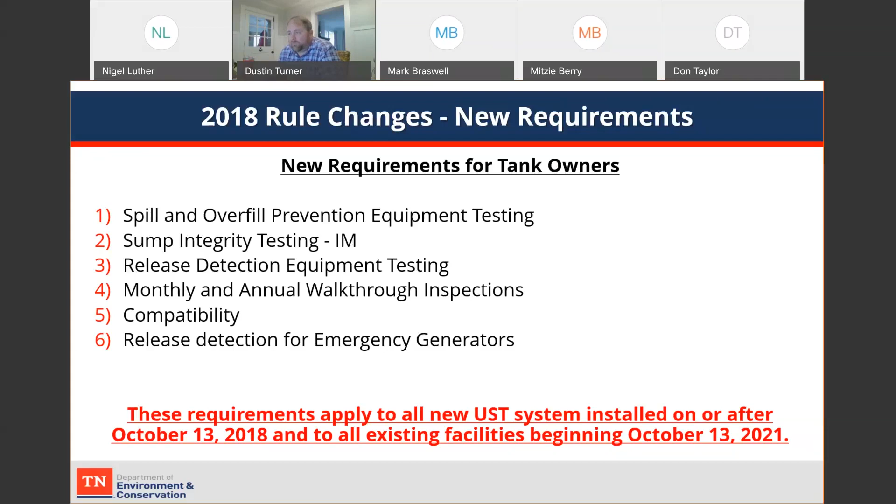Okay, so testing requirements. EPA says that these testing requirements must be conducted by a qualified person, and they sort of define that as 4 or 5 different areas here. Licensed contractor certified by the manufacturer obviously would be one. So if you have a Veeder-Root, anybody licensed to install or service that would be able to do the testing requirements for you on that.

Also, we can approve people. With the Division UST, you can get approved if you don't have a specific certification. You can request approval that way as well. All the testing has to be conducted with division guidance. And if you can demonstrate adequate experience, that's a way that you can be approved by us.

PEI also has some certifications. So as long as it's a nationally recognized organization such as PEI, which is the Petroleum Equipment Institute, that would also qualify you to conduct the testing needed. All the testing must be conducted and recorded in accordance with the device manufacturer's instructions. So each specific piece of equipment, each manufacturer is going to have their own specific testing protocol.

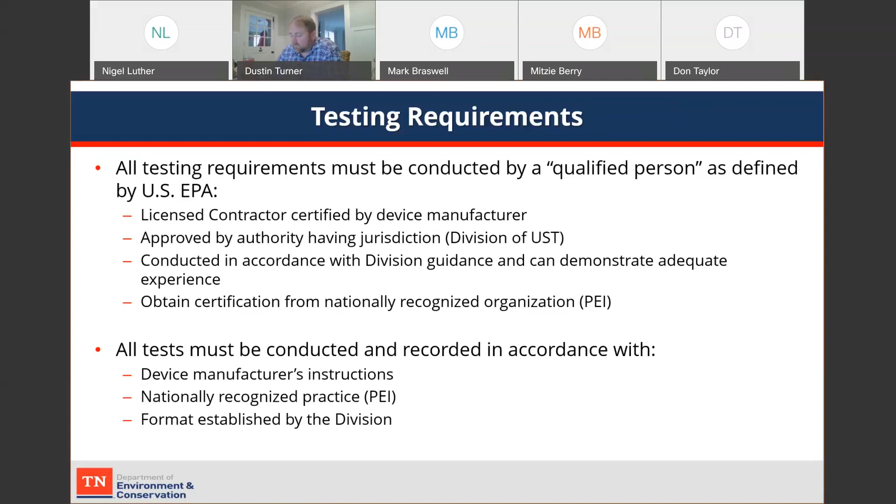Okay, so these are some spill and overfill devices. We just wanted to put some pictures up here to show you some of the equipment that you may have at your facilities. To the left, here's just a normal spill bucket. After it's been replaced, it looks like fresh concrete around it. They're also doing a hydrostatic test on this, it appears.

Next to that's a ball float. We're phasing those out. So if your facility has ball floats, we'll get into that here in just a few minutes. But there's some testing that you have to start doing of your ball floats to make sure that they're in place and functioning correctly.

Next to that's going to be an overfill flapper valve, sort of what it's called most commonly across the spectrum. It's another overfill device. It shuts off the flow of your delivery once the tank reaches a certain point, depending on where it's set at. Should be at least 95%. And then over here at the far right, we have an overfill alarm, which has got an audible speaker in the box and a light that alerts the driver when they hit that threshold.

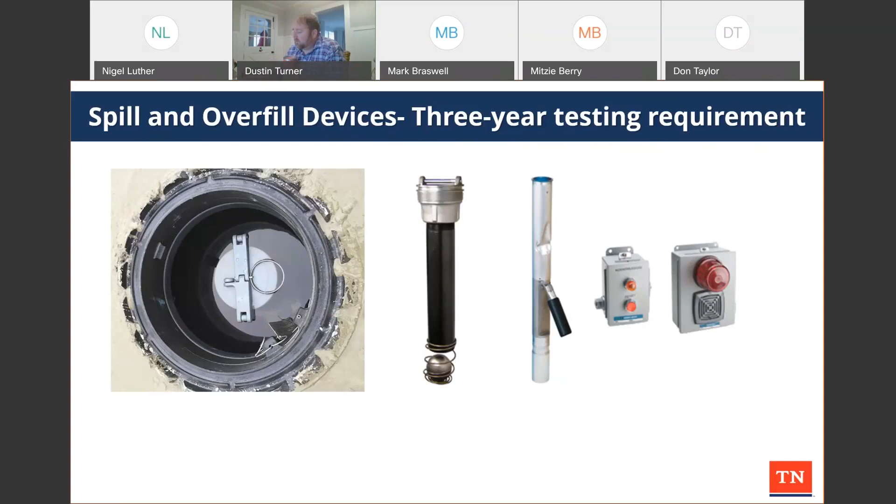Okay, so for spill prevention devices, your action is going to be to conduct a spill prevention integrity test every 3 years. Using the division form, or a double wall spill bucket with interstitial monitoring may be used in lieu of doing a wet test. There's also some other test methods that are becoming prevalent with all of these new requirements.

There's some dry methods where you don't have to use water to do your test. So there's all sorts of new technology coming out. Who knows what we'll have in a year or two from now. But there are other methods other than doing a wet test. So just consult with whoever your testing company is. Either one is acceptable as long as it is a third-party certified method.

So your responsibility will be to maintain a passing spill prevention integrity test within the last 3 years, or the documentation that the prevention equipment is double walled and monitored continuously. I'll get into that here just a little bit, the next slide, I believe, as far as what equipment you have to have in lieu of doing the spill prevention device testing.

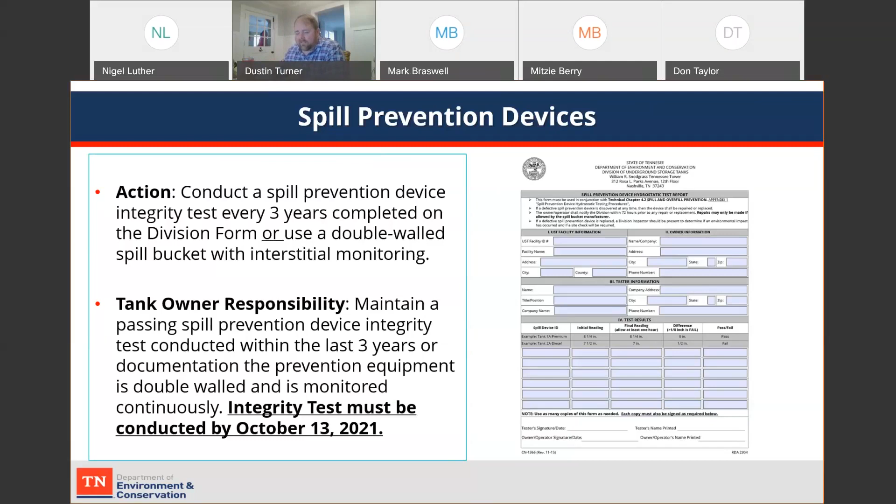Also, this integrity test must be conducted by October 13, 2021. Now, you're going to hear this date a lot through this presentation. We just want to emphasize that all these requirements are due by that date.

Okay, so if you have the capabilities at your facility, you want to install a double wall spill bucket, and you want to install a sensor in the interstice, an electronic sensor that's hooked to your leak detection equipment, your automatic tank gauge, or there are some standalone units that you can use. This will allow you not to have to wet test your spill buckets, but it has to be monitored just like you would if you had a double wall tank.

You have to keep a monthly alarm history of each sensor in your spill bucket, and a sensor status report monthly. Now, even though this is not leak detection, that's the requirement that allows you not to have to do the wet test every 3 years. So it's probably a little bit more work to do it that way, but if you don't want to do the wet test, that's the way you can do it.

If you have an IM site already, it really won't be that big of a change for you. Just keep it like you would everything else. But it's not part of monthly release detection by rule. So if something happens, it is looked at differently, just like a spill bucket log is currently.

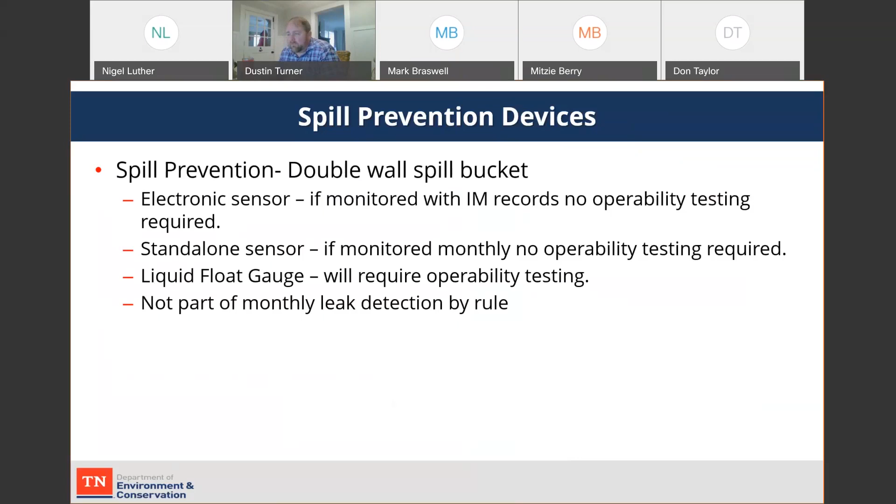So if you have more questions on that, I know it may be a little bit confusing. Reach out to your local field office, me or Don. We'll be happy to explain, sort of walk you through that if that's something that you want to think about doing for your site.

Okay, overfill prevention devices. These devices must be inspected every 3 years. And then as a tank owner, you have to retain those records. You have to maintain the records that demonstrate that your overfill functionality test was conducted within the last 3 years. This applies to all forms of overfill, and documentation must be maintained for 3 years on this.

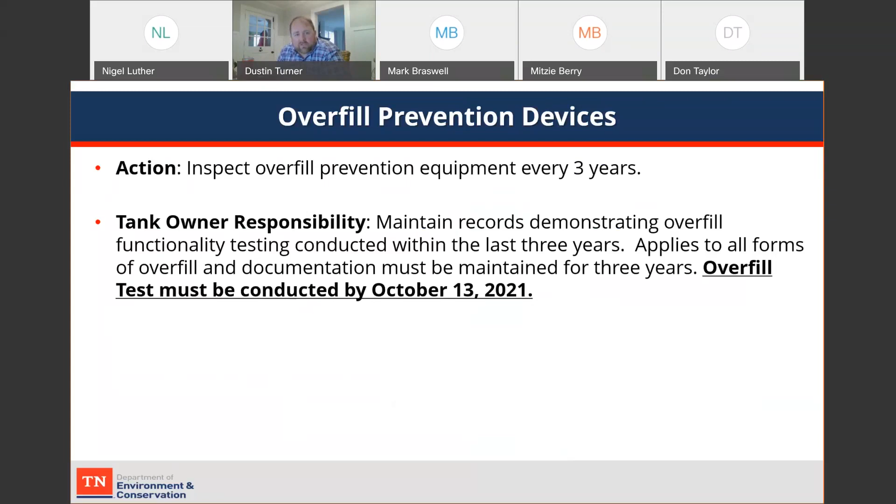So overfill tests must be conducted by October 13th of 2021. You're going to have that date as memorized as we do by the end of this presentation. But this is where they're going to remove your overfill prevention device and make sure that it functions, once every 3 years going forward. Okay.

So we've got 3 types of overfill prevention. Automatic shutoff, which a lot of times is called a flapper valve by your contractor and us as the regulatory entity. This is going to be set to fully engage at 95%. So when your tank's 95% full, this is going to shut off the flow to the delivery driver.

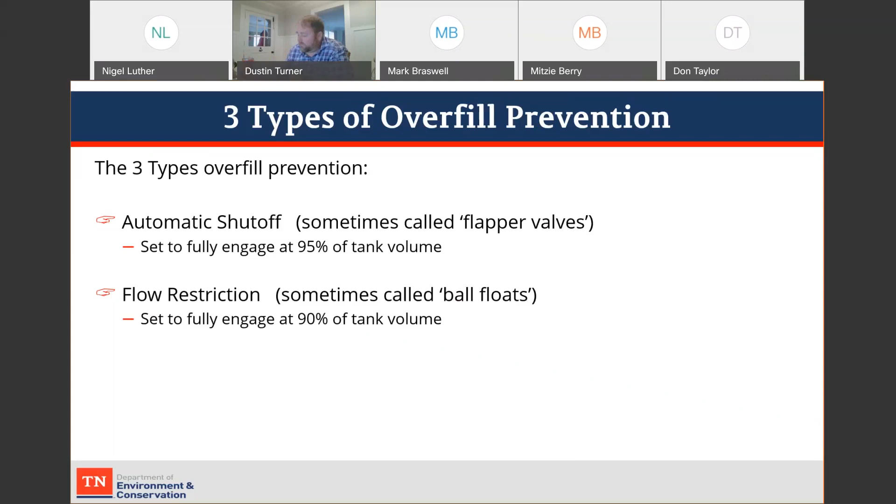Flow restriction, also called ball floats, is the little cage at the bottom of the tube with the ball hanging in it that was in the earlier photo. These are set to engage fully at 90% tank volume, so they'll alert the driver by slowing down the delivery. It doesn't actually shut it completely off.

However, these are being phased out. They cannot be replaced or repaired after October 13th of this year. So the only two options after that date for replacement are going to be an automatic shut-off device or overfill alarm. Overfill alarms, sometimes called high-level alarms, have to be set at 90% tank volume to alert the driver outside by speaker and a visual blinking red light that the tank's almost full.

And they must be visible, so whenever you have your system installed, just make sure that you consult with your installer that they understand, and they all do, that the delivery driver has to be able to see the alarm.

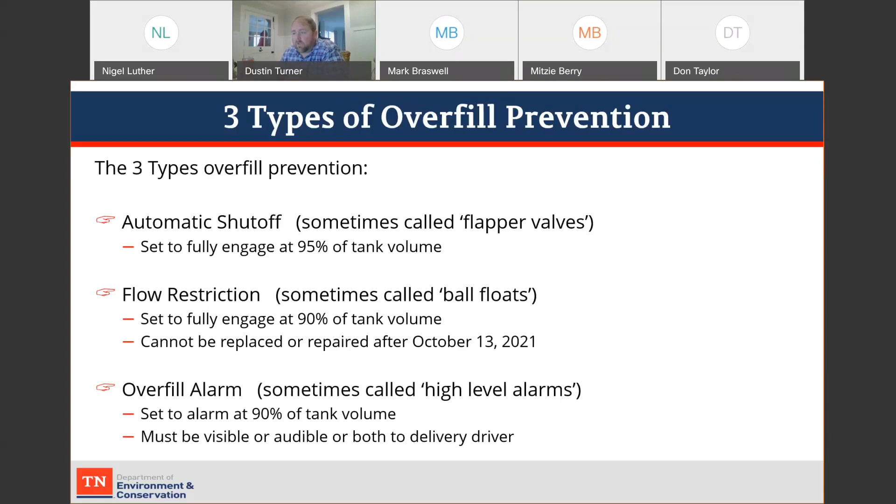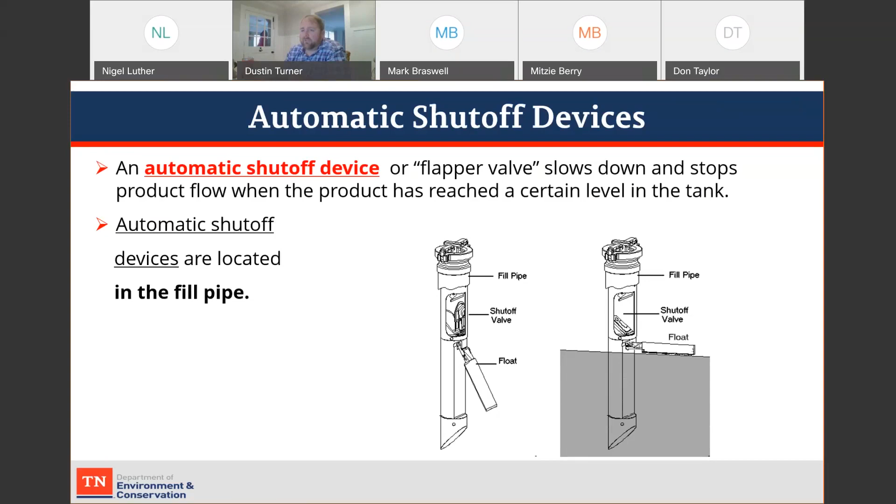All right, so here's the ball float valves. This is actually one hanging in a tank. As the fill occurs, once the liquid level reaches the ball, it's designed to float up and shut off the vapors from coming out of the tube. That's supposed to be set at 90% capacity.

So that'll be one of the things your contractors are checking when they remove this equipment to do the functionality test on it—making sure it's set at 90% and that it functions properly.

If they're found damaged or non-functional during that functionality test, you have to change method. This one's no longer allowed. You have to go to either an overfill alarm or the drop tube flapper valves.

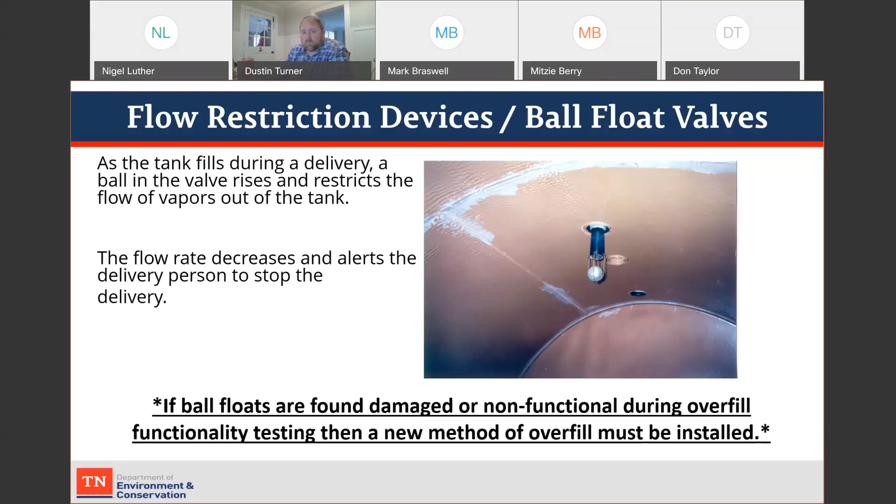All right, so overfill alarm. It uses a sensor in the tank, the same sensor that controls and lets you know your inventory and water levels—the same probe used to monitor the product in the tank. An overfill alarm provides a warning when the tank is close to 90%, which is what it has to be set at, and it has to be seen or heard by the delivery driver. When the alarm activates, the delivery person stops the flow of product to the tank immediately, obviously.

Dustin, if I could interrupt you for just a second. I do have a question from Tim Lassiter. The question is, if you have an automatic shutoff valve, do you also have to have an overfill audible alarm and lights?

No, good question, Tim. Thanks. No, one or the other—or you can have multiple, don't get me wrong. You could use a flapper valve and an alarm if you want to, but you're only required to have one of the three installed at your facility.

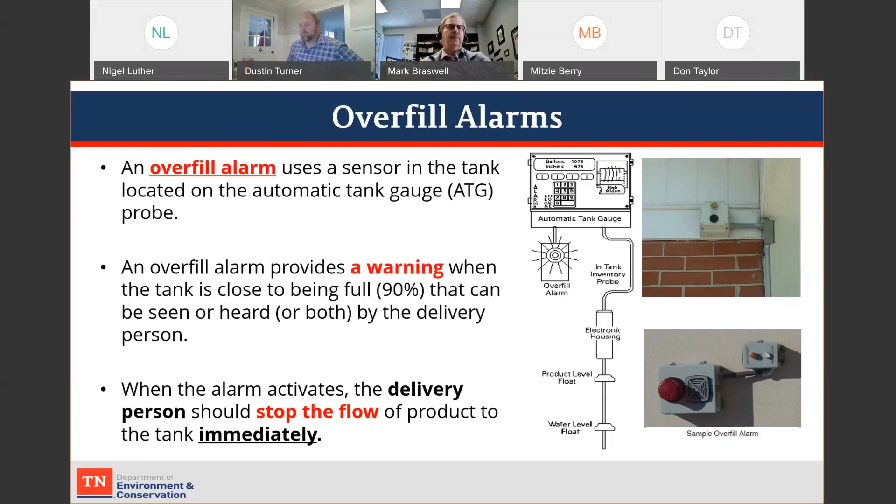Great, I appreciate that. Okay, that's all we have for now. Thanks, Dustin, I appreciate it. Yeah, no problem.

Okay, so spill and overfill equipment repairs. If you have a repair to your spill or overfill equipment, you have to test or inspect those components within 30 days after the repair or replacement of the spill or overfill prevention equipment.

A lot of you are going to have some failed equipment this first go around, especially. Just ensure that your contractors don't get in a hurry and forget to do the function test once they repair and replace your equipment. They should be able to do it as soon as they complete the repair, but sometimes they forget. You've got to have that done within 30 days of the repair being completed.

You have to maintain documentation of that test for your records also, and we'll get into the retention times a little bit later in the presentation. Just make sure that you do have a test once something's replaced, and that you hang on to it.

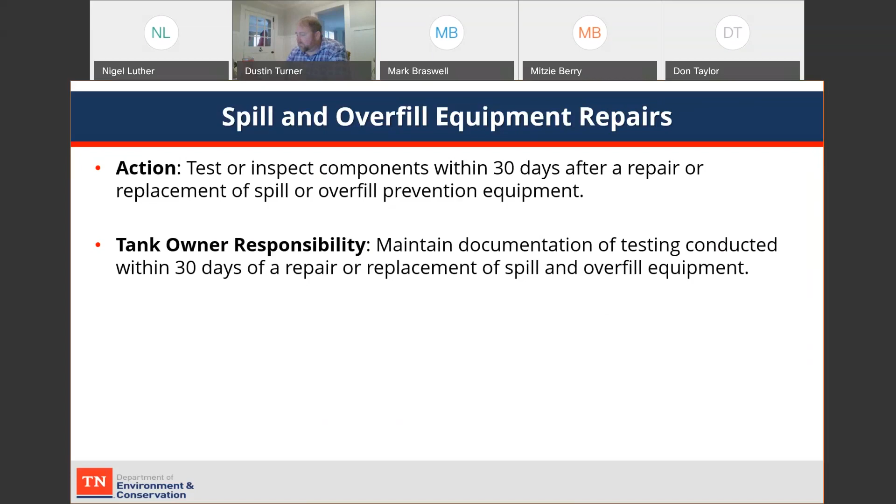For interstitial monitoring systems, which use IM for piping release detection, you must conduct a sump integrity test every 3 years. If you've got a newer facility with sensors in the dispenser sumps and tank top sumps, you have to test each one of those sensored sumps once every 3 years. There's a wet test method, and there's also some dry test methods out there that are becoming more popular. If you have a question about that, reach out to one of us, or your contractor should also be able to answer those questions for you.

Tank owner responsibility is to maintain a passing sump integrity test within the last 3 years. So when we come after October 13th, we're going to ask to see your last passing sump integrity test. As long as it's dated within the last 3 years going forward, you'll meet the requirements of this rule. Your sump integrity test records must be maintained for 3 years. So if you had one 6 months ago, it's still good for 3 years. You don't have to do it again before October 13th.

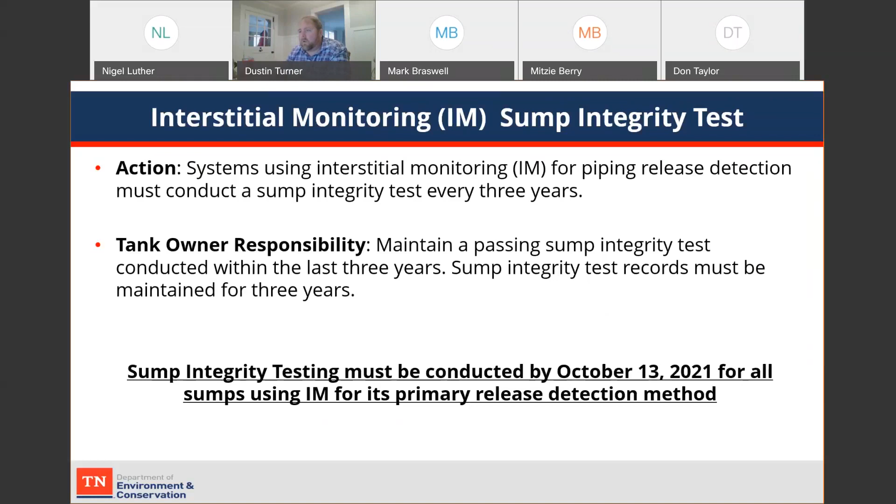All right, so tank and sump repairs. All the tank and piping sump repairs must be integrity tested within 30 days of completion, just like for the spill and overfill. Your tests need to be conducted in accordance with the manufacturer's instructions, any division guidance that we have, a code of practice developed by a nationally recognized association, and requirements determined by the division to be no less protective of human health and the environment. So that's the 4 criteria for the test.

Maintain your test record for 3 years, and the repair records for the operational life of the UST system. We're going to get into the retention time a little bit later, but any sump repairs, tank repairs, or piping repairs have to be kept for the life of the system.

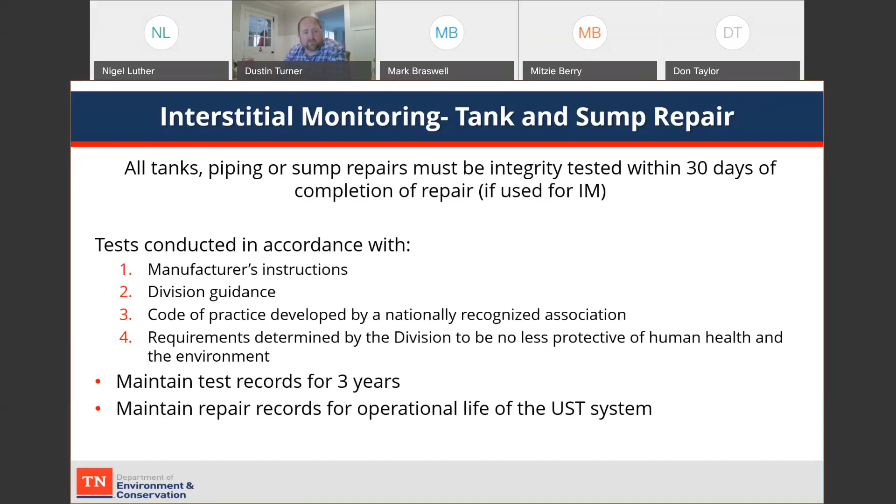All right, so water disposal. This is the big question everybody's been asking for a few years now. UST division, Tennessee Division UST, does not regulate the disposal of petroleum contaminated test water. So who does? Well, test water should be properly disposed of, and we've got some resources here for you to reach out to if you suspect that somebody's not doing this properly for you. Contact the Division of Solid Waste Management or the Division of Water Resources if you suspect that someone is not properly handling the test water from your facility.

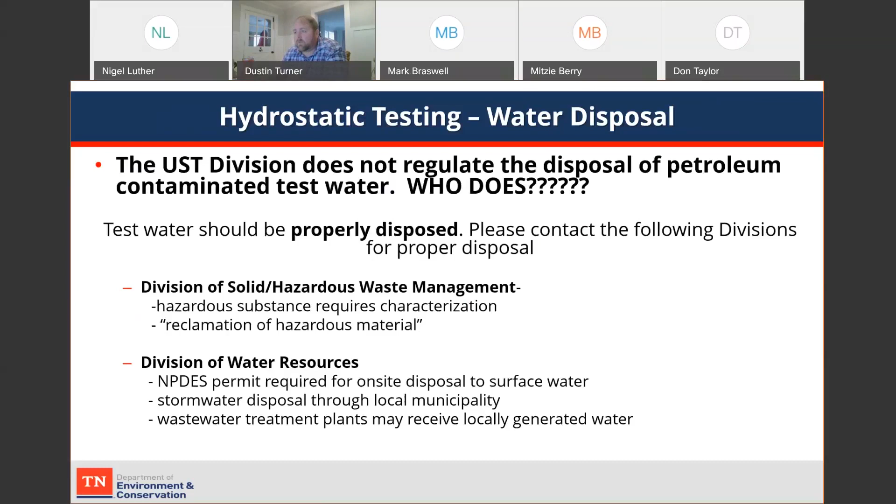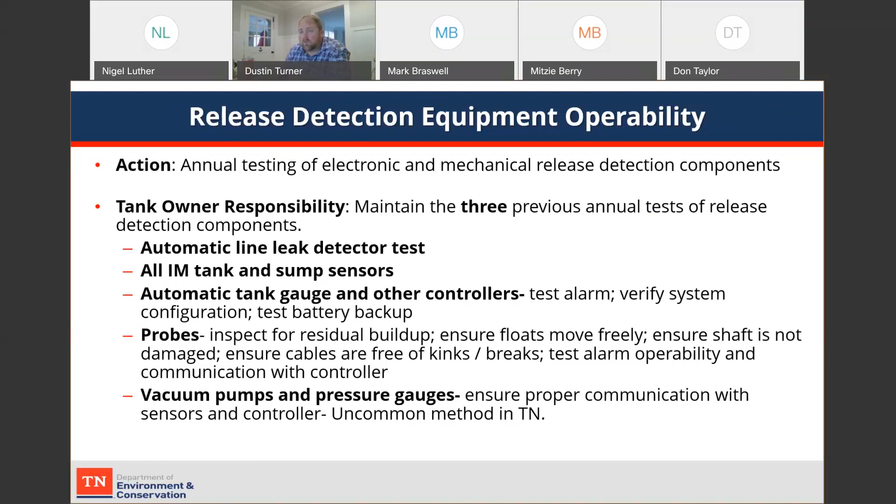We've got an interstitial monitoring sensor under it in a sump. Now this one, most of them don't look like that because that is a PVC cap that's got a hole drilled through it and a pipe with some holes drilled through it, that's PVC to house the sensor. Most of these sensors are great, but some of them are metal little bell sensors, but that's not an actual sensor there. It's just a housing. There's a sensor inside of that.

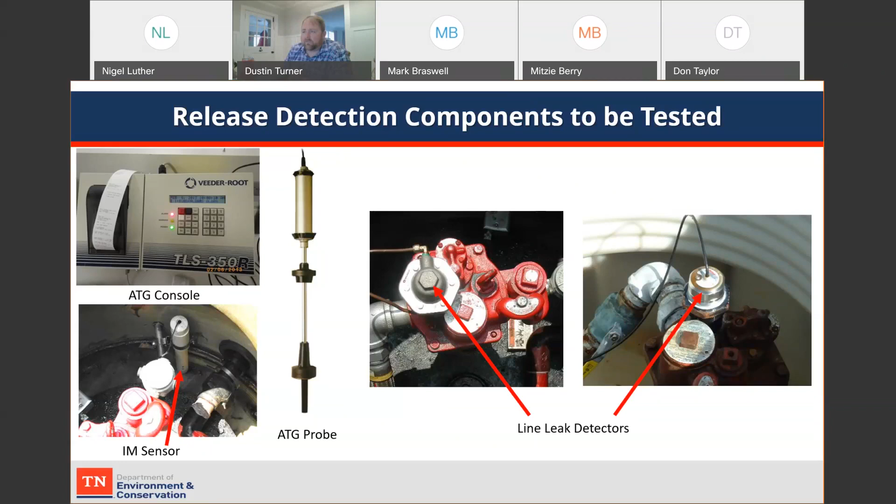All right, East Tennessee Co-op, I believe.

Okay, so monthly walkthrough inspection. All right, so your responsibility is going to be to maintain the records of a monthly walkthrough inspection that you conduct every 30 days, and it's going to consist of the following.

You're going to inspect your spill prevention for liquid, debris, or damage. So just like you always did before with the monthly spill bucket logs, it's just part of the monthly walkthrough inspection now.

Okay, visually inspect the tank fill riser, drop tube, and flapper valve to make sure that it doesn't have any damage. Also, make sure there's nothing in that tube.

It's not uncommon for a delivery driver to accidentally or intentionally, who knows, leave a fill or leave a gauging stick in that drop tube. We've seen it various times over the years. But anyway, if you find something in there, remove it. And also, you may want to have a conversation with your delivery company if that is something that you observe.

Also, you're going to check for the operability of your release detection equipment. So just make sure that you're getting your monthly or your printouts. If you've got it programmed for weekly, daily, sometimes people do, make sure that it's actually performing that function as you have it programmed.

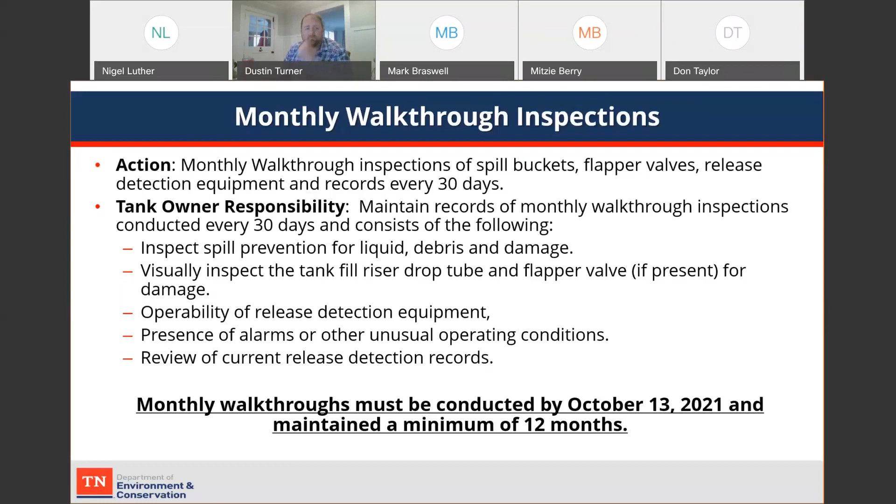Okay, so every 30 days, inspect your spill buckets, just like before. Remove any liquid, check for cracks or damage.

Also, inspect the fill cap. Make sure that it fits properly, that there's a rubber O-ring gasket on the bottom of it. Make sure that you have that, because that's a very easy way for water to get in your tank if that O-ring is not in place.

Also, make sure that your cap's not hitting your spill bucket lid. But those can't come in contact with the cap.

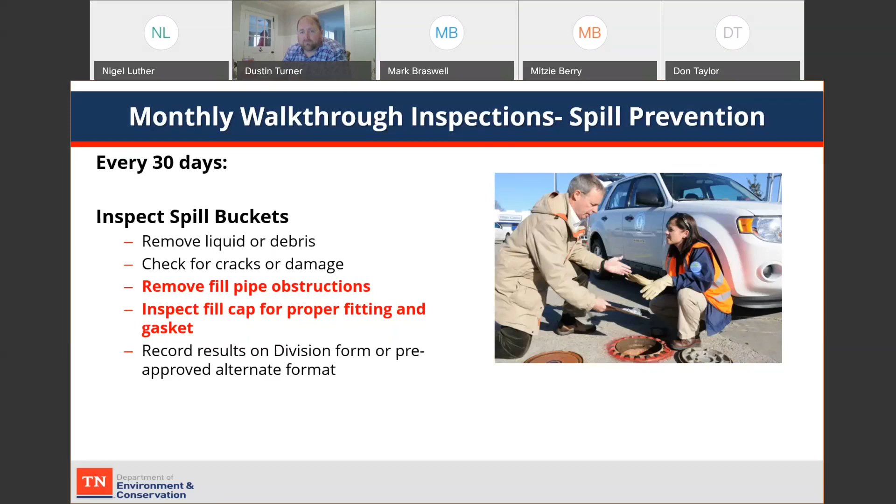Okay, so also every 30 days, you're going to have to inspect your release detection records. This is what we've got in here for SIR, which is statistical inventory reconciliation. You want to review your data and accuracy of daily fuel level readings. That's nothing new. You're going to check your tank monthly for water, that's always been a requirement, nothing new there. And then you're going to make sure that your SIR reports are received every 30 days from your vendor. So at the end of your reporting period, you want to make sure that you have your reports by then.

Also, review your results, and you have to report any suspected releases. So any consecutive inconclusives or any fail has to be reported to the division within 72 hours.

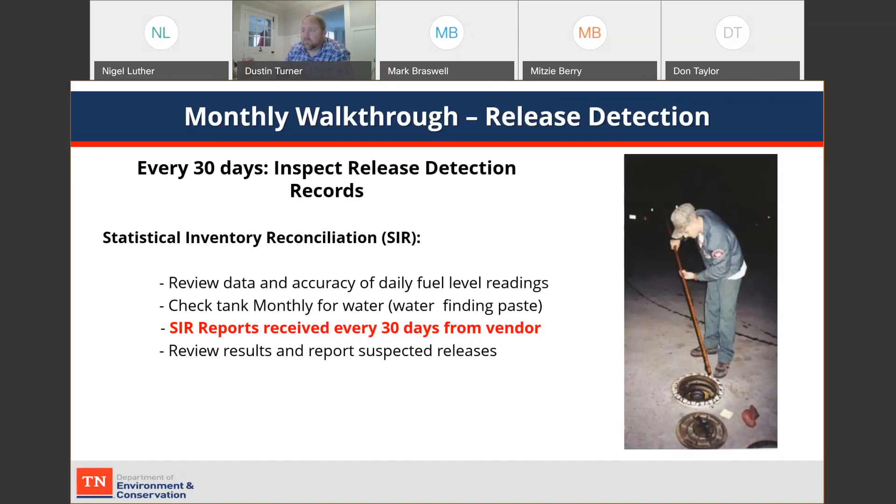Also, you have to report all suspect releases, so there is a box for that on the monthly walkthrough.

So this is sort of just a reminder. If you're on continuous leak detection, CSLD or SCALD, if you have an INCON, and you're unable to get a passing test, you can run a static test on any ATG. The only stipulation is you have to shut your store down for at least 3 or 4 hours to get a test run, but that is an option. We see it doing inspections, and I don't know how many people really know that is an option. So we wanted to make sure that we mentioned that today.

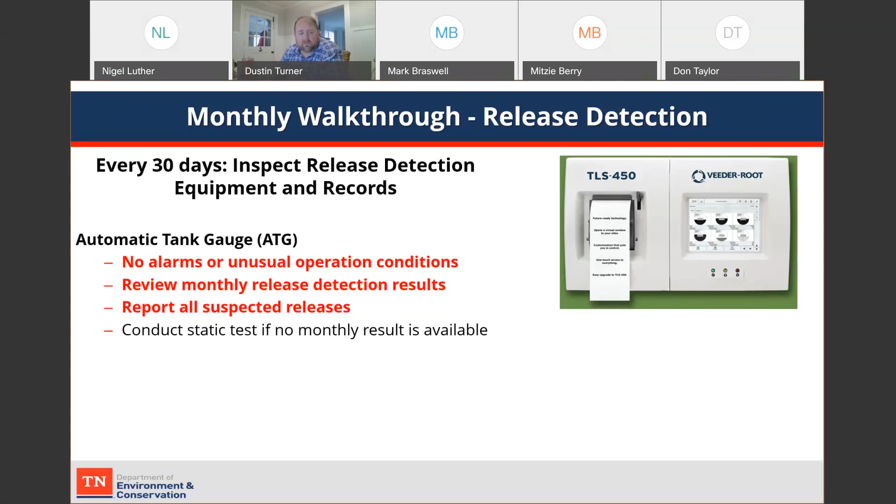If you do, you have to investigate those. You have to log that on the form as well. And if it's not able to be reconciled in 72 hours, then you have to report that as a suspected release to the division.

Document your alarms and your response to them on the monthly inspection form. So if you have a heavy rain event and you get a foot of water in one of your STP sumps and you have to get that pumped out, just make sure you document that that was the cause of the alarm, that you had it removed, and the timelines on it.

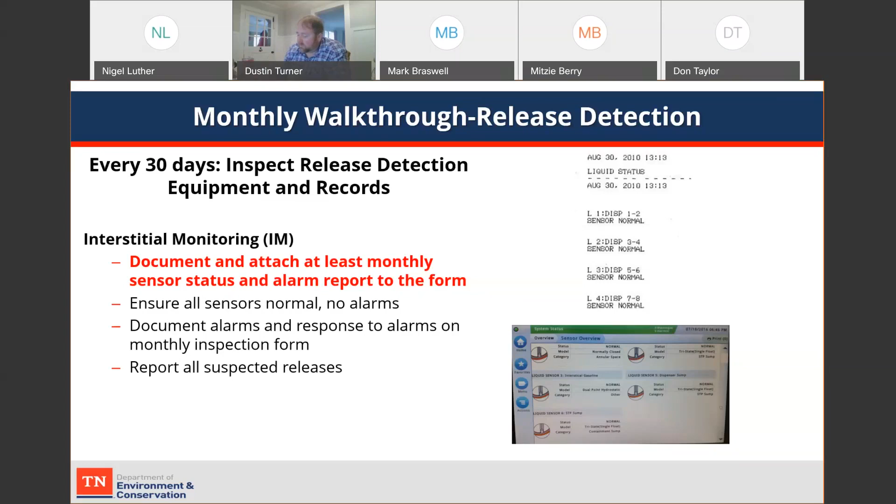Okay, so report all suspected releases. Just like always, you got 72 hours to notify us.

Okay, so here's an example of the draft annual walkthrough inspection form page. This is like a 5 or 6 page document, so I really encourage everybody to go and look at it and give us some feedback on your thoughts of it. But what we've done is pretty much combined where we would have 4 or 5 forms previously where you'd have to keep up with. Everything's on one form now for your facility. So as long as you keep up with this packet, you should have everything that you need in one place.

The annual walkthrough requirements are that you need to conduct the annual walkthrough in accordance with one of the following: your device manufacturer's instructions, obviously. There's also a PEI form, about 8 pages long. In the interim, if you wish to use that form until our draft form is finalized, you're perfectly allowed to do that, and there's a link in the presentation I did on walkthrough inspections to that form.

Lastly, our form is what we recommend, obviously. As soon as it's finalized, we highly recommend that you use our form to do your monthly and annual walkthroughs.

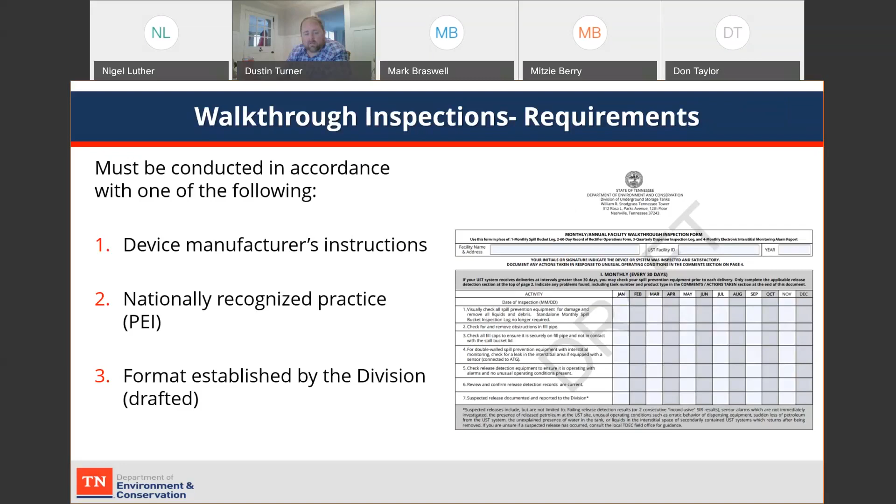So annual walkthrough inspections are conducted once a year, obviously, and they consist of the following: you're going to visually check for damage, any leaks to the containment area, or releases to the environment. Also, you have to look at contained and non-contained dispenser sumps, so you want to look under your dispensers, whether they're contained or not.

And you have to maintain that on a quarterly basis still also, so I don't want to confuse anybody in thinking that they don't have to look under their dispensers quarterly still. That still is part of the monthly walkthrough, it's just still done quarterly though, but it is part of that form.

Also, you have to look in your STP and transition sumps. If you don't know what a transition sump is, I'll briefly mention that, even though it is pretty uncommon. If you've ever had a piping upgrade, sometimes they'll take and connect an old piece of pipe to a new piece of pipe, and they'll have to cut out a box. It'll usually be a square box with a lid on it where they have joined those two pipes together. So make sure you're looking at pretty much just if you've got a cover over something, a manhole in your lot—look in there and make sure that everything looks normal.

So if you have contained sumps, you need to remove that liquid or the debris. Even if you have a contained sump that does not require interstitial monitoring and you have an anode, let's say it's full of water—I'm just going to give you an example—so it's full of water, you've got an anode in there that you test every 3 years for corrosion of your flex connectors. You still need to remove that liquid annually to make sure that you don't have a leak somewhere.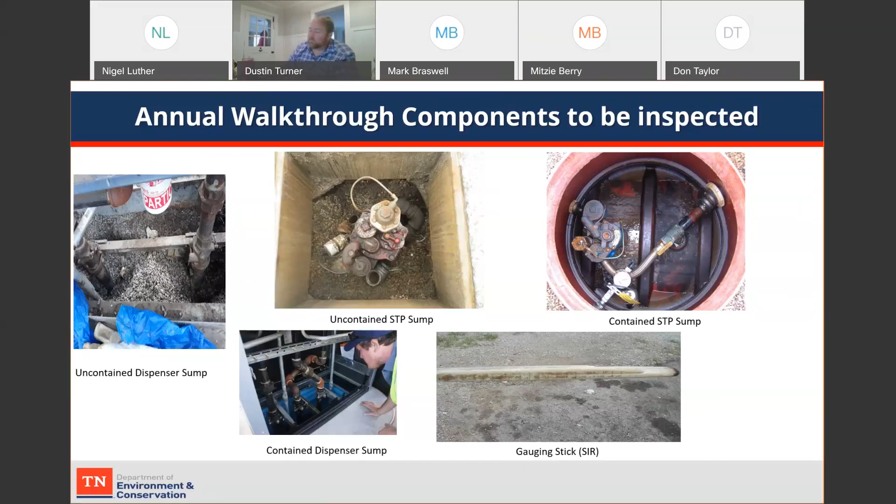Record keeping. We made it to here. So you've got to maintain the monthly and annual walkthrough inspection records for 1 year. This includes a list of each area checked, which is all in the form, whether each area was acceptable or needed action taken, and a description of the actions taken to correct the issue.

Okay, so if you have a tank that gets a delivery less than every 30 days, you need to keep your delivery invoices handy for us to look at. I think those are going to be super rare. I've never seen one myself. Well, I'm sorry, one site. I've had one site like that.

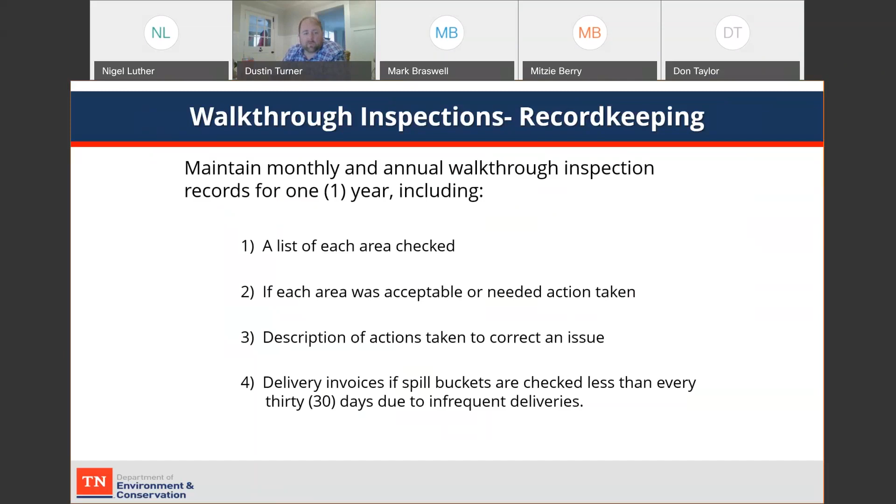Okay, so just some general record keeping. Here we go. This is how long you need to keep everything. 12 months of leak detection results. Annual line leak detector test results. Release detection operability. Line tightness test or 12 months of your pipe and monthly monitoring results if you have electronic line leak detectors. 12 months of walk-through inspection.

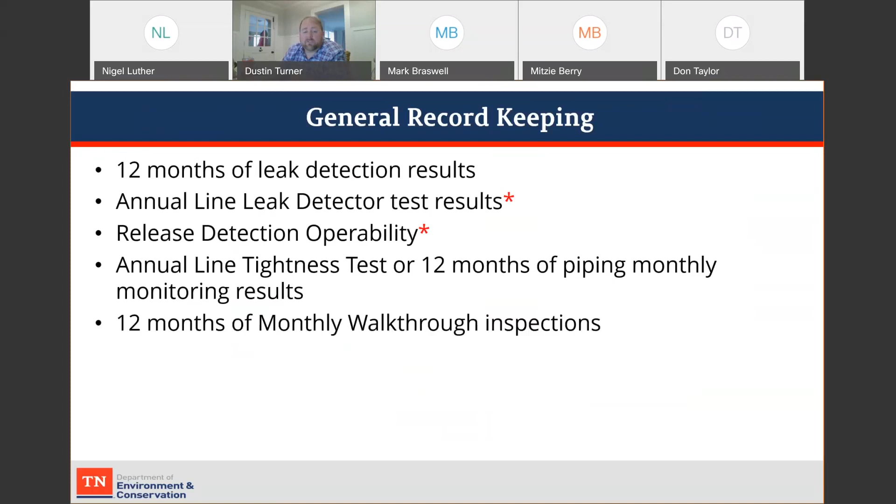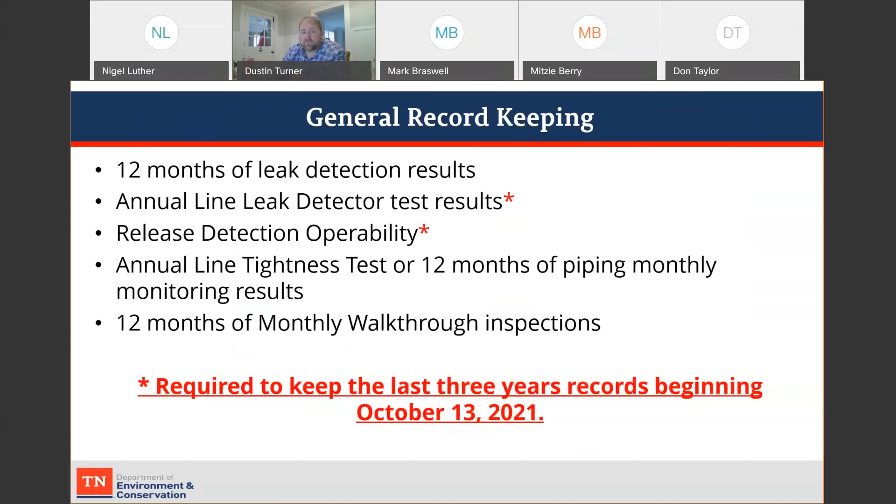And the asterisk there, you're required to keep the last 3 years of those records beginning this year. So you have to keep the last 3 leak detector tests and the last 3 release detection operability tests, which is your sensor function test for your interstitial monitoring, things like that.

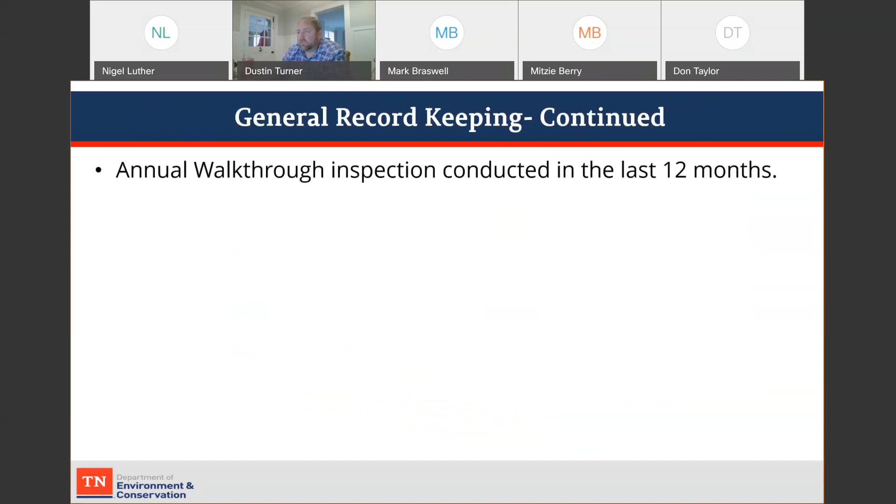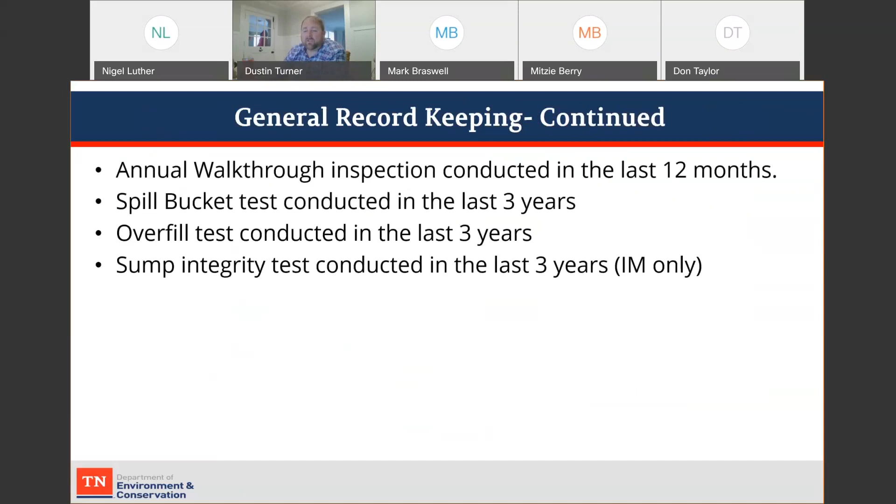Okay, so annual walkthrough inspection conducted in the last 12 months. This is just sort of a checklist for you. Spill bucket test conducted in the last 3 years. Make sure you've got an overfill test conducted in the last 3 years. Make sure you've got a sump integrity test conducted in the last 3 years, only if you have interstitial monitoring as your primary method of release detection.

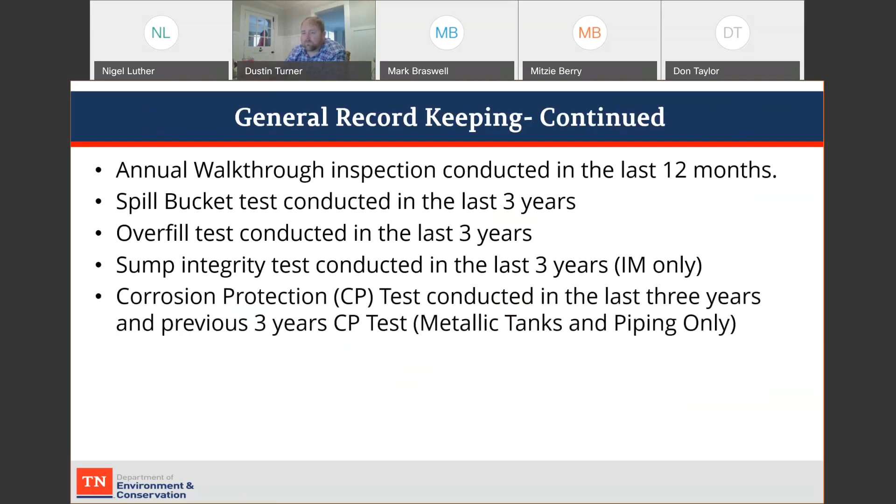Corrosion protection test must be conducted in the last 3 years and the previous 3 years CP test. So you need two CP tests, the current one and the most recent one prior. So 2 corrosion protection tests. Your 60-day rectifier log, that is included in the monthly and annual walkthrough form.

Any non-safe suction line tightness test, it's also called US suction. Anything that is not a safe suction line, you have to do a line test every 3 years, and that record's good for 3 years. So you have to do that once every 3 years, and it's good for 3 years.

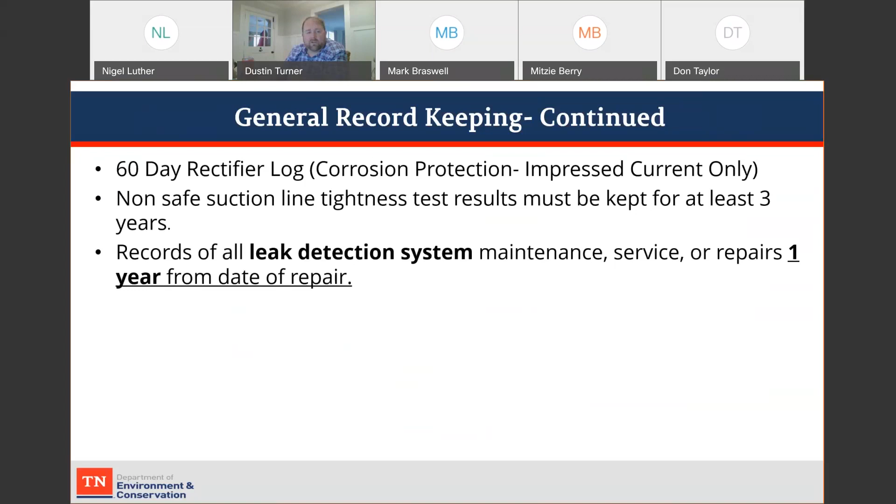All right, so records for all leak detection system maintenance, service, or repairs, you have to keep for 1 year from the date of that repair. Any documentation of tank or line repairs has to be kept for the remaining life of the UST system. So this is sumps for interstitial monitoring, and any tank or line repair has to be kept for the life of the system.

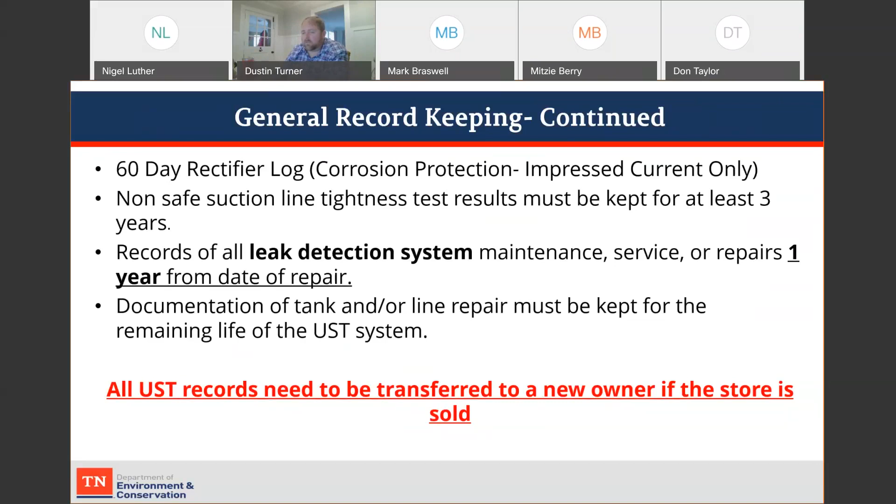Also, we see a lot of times these stores change hands quite often. Make sure if you sell your facility that you transfer the records. It's actually in our rules, but just make sure that you hand over anything you have to the new owner. Makes it a lot easier on them, a lot easier on us. I know, but try to make sure to transfer your records to the new owner if you sell it. All right.

Compatibility. E15 is probably coming. I don't know when. It's already in Virginia, I do know that. So I'm sure it won't be long before it's in Tennessee, and it may already be here. I don't know. But if your UST system is used to store more than 10% ethanol or more than 20% biodiesel, you're going to have to comply with the requirements for fuel compatibility.

And you have to notify the division 30 days prior to storing that fuel. So as soon as you know you're going to make the switch, you need to do a notification form and also notify us, and then we'll tell you what you've got to do. So just basically notify your local field office.

You have to provide documentation showing that all of your UST system components, including your tank, piping, sumps, pumping equipment, release detection equipment, spill prevention equipment, and overfill equipment, are compatible. And we have a compatibility checklist for you to do that. There's a link at the bottom of the slide. And then you also have to have a statement of compatibility.

So, I'm sure this is coming. I don't know if it'll be this year or not, hopefully not with all the other changes that we have going on. But I'm sure in the future, some of you may want to add some higher ethanol blends.

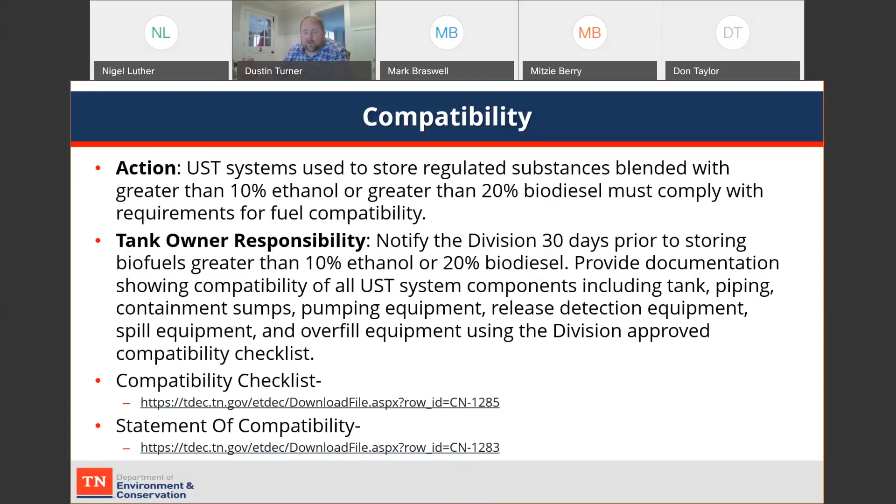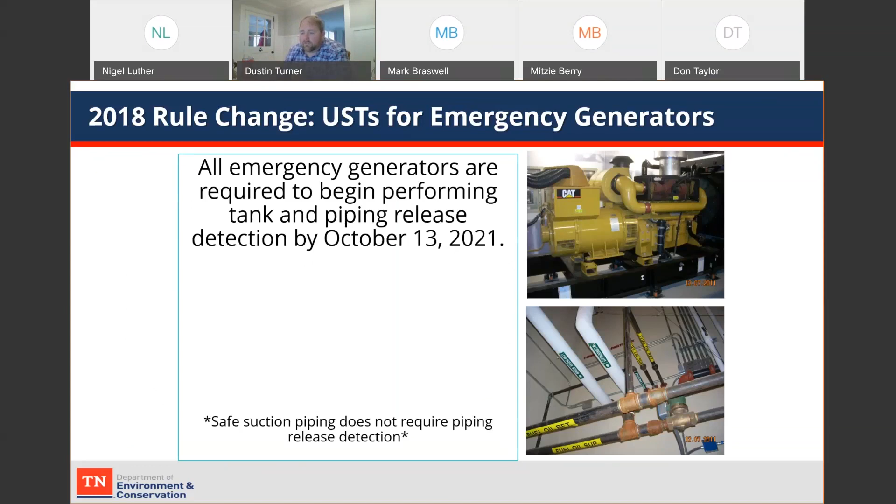Okay, so there's probably not a lot of folks on here with an emergency generator system, so I will be brief on it. Basically, it's a huge change for generators, but anyway, they're required to start using tank and piping release detection by October 13th of 2021. Obviously, safe suction piping does not require the release detection, but any of the tanks do.

So what I want to emphasize here is if you have one of these systems and you have any kind of questions at all, please contact your local field office. They'll get you in touch with our staff that have the most experience in these changes, and they will let you know exactly what you need to do.

So that's the thing I want everybody to remember. If you have a system like this, just reach out to your local office, and we'll work with you. If we need to come out ahead of time, see what you've got, and help you come up with a plan, we're happy to do that.

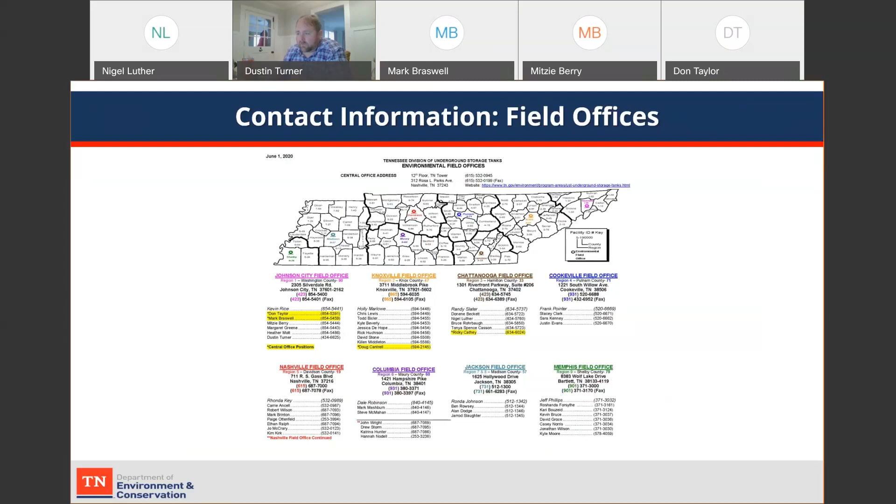All right, so here's the field offices: each of the regional field offices' phone numbers. All their staff are on here. So this is a good resource for any of you to have. And feel free to call us with any questions. The more you know, the easier our jobs are. So ask a lot of questions. We want you to know what you need to be doing, and we'll help you get there.

All right, so that brings us to the end. Any questions on that? Mark, you got any new questions? I wanted to just go over a couple of them. I provided answers in the chat.

One question by Ed Adams was whether the forms are new ones, and I answered that basically many of them are revisions, but one of the new ones is the walkthrough form. So just to encourage everyone, while they're still under public comment, to take a look at those forms and give us feedback. And in the meantime, for the walkthrough form, you can use PEI or the manufacturer or anything that has the requirements in the walkthrough rule.

So we want the public to have full access and comments back to us in developing these forms. That's one of the reasons why we extended it. It's a voluminous amount of material for the standardized inspection revisions and associated forms, so we extended that period a couple of months. So until we make those final, at least for the walkthrough form, especially consult PEI or the manufacturer.